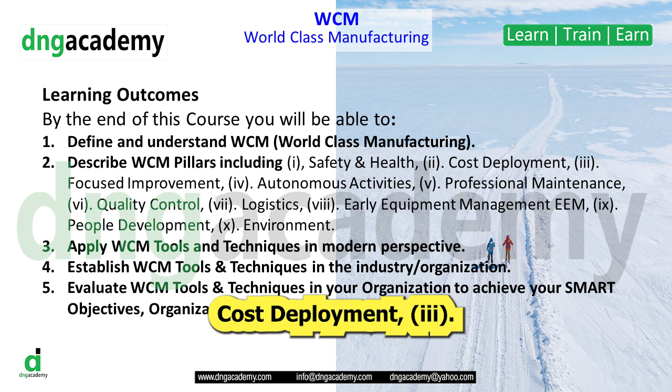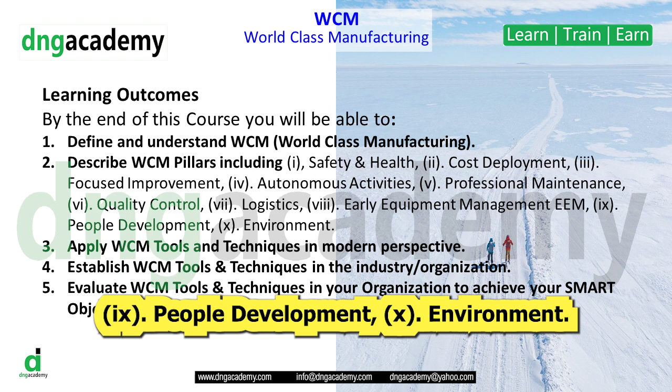By the end of this course, you will be able to: 1. Define and understand WCM. 2. Describe WCM pillars including safety and health, cost deployment, focused improvement, autonomous activities, professional maintenance, quality control, logistics, early equipment management (EEM), people development, and environment.

3. Apply WCM tools and techniques in a modern perspective. 4. Establish WCM tools and techniques in the industry organization. 5. Evaluate WCM tools and techniques in your organization to achieve your SMART objectives, organizational goal, and vision.

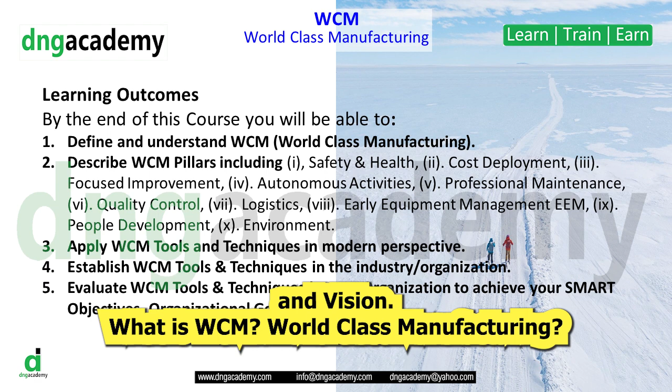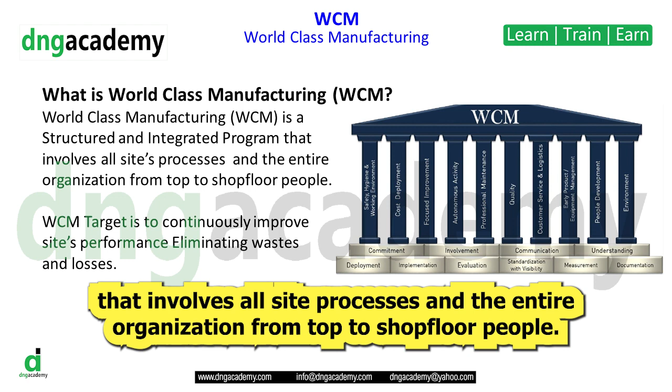What is world-class manufacturing (WCM)? World-class manufacturing is a structured and integrated program that involves all site processes and the entire organization, from top to shop floor people. WCM's target is to continuously improve the site's performance, eliminating waste and losses.

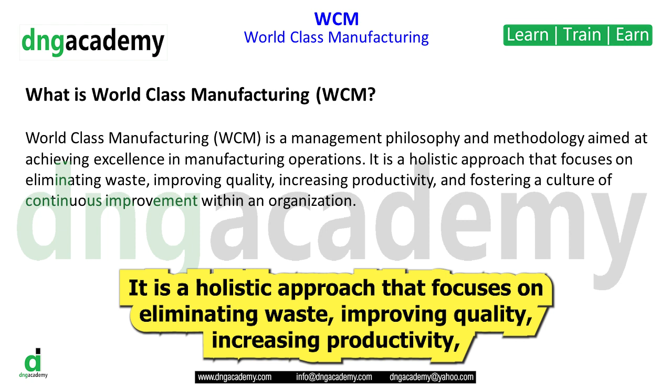World-class manufacturing is a management philosophy and methodology aimed at achieving excellence in manufacturing operations. It is a holistic approach that focuses on eliminating waste, improving quality, increasing productivity, and fostering a culture of continuous improvement within an organization.

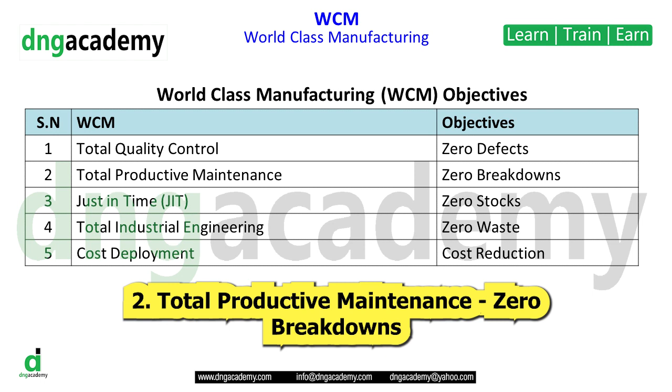1. Total quality control - zero defects. 2. Total productive maintenance - zero breakdowns. 3. Just-in-time - zero stocks. 4. Total industrial engineering - zero waste. 5. Cost deployment - cost reduction.

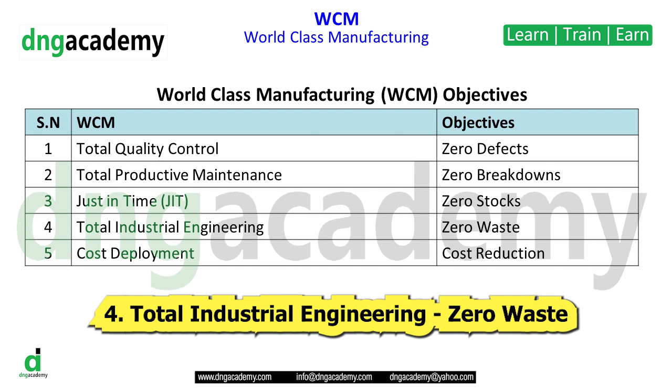WCM is not a project. WCM is not a toolkit of methods and tools. WCM is not a restructuring program. WCM is not a technical job for operators and engineers. WCM is not top-down or bottom-up. WCM is not an activity-oriented program. WCM is not a cost-cutting program.

WCM is a program, a way of working. WCM is an integrated production system. WCM is continuous learning improvement. WCM is a leadership and management program. WCM is top-down and bottom-up. WCM is a result-oriented program. WCM is a safety, quality and productivity program.

Why do we need world-class manufacturing? We need a production system which is simple, rigorous, flexible, powerful, and involves people.

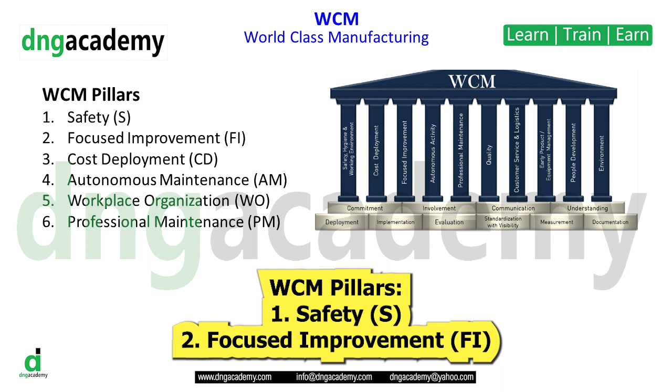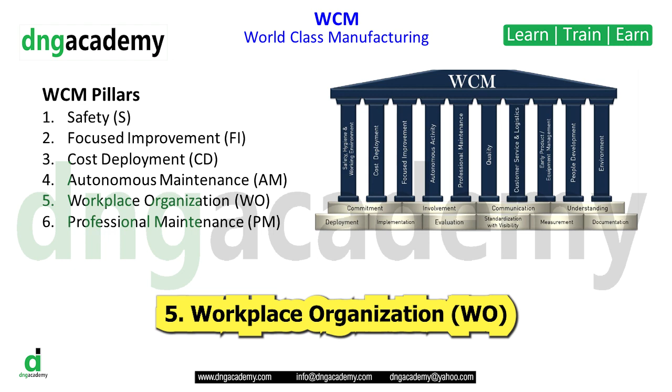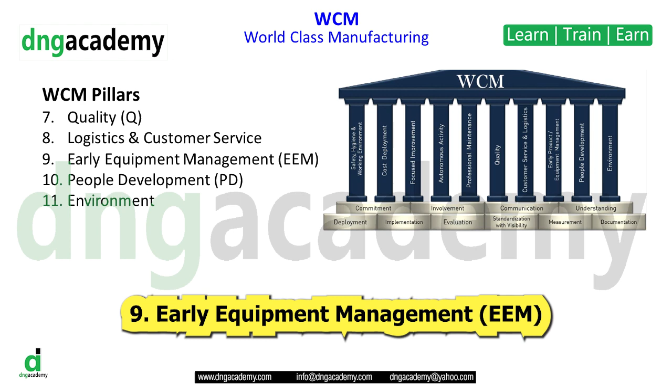WCM pillars: 1. Safety. 2. Focused improvement. 3. Cost deployment. 4. Autonomous maintenance. 5. Workplace organization. 6. Professional maintenance. 7. Quality. 8. Logistics and customer service. 9. Early equipment management. 10. People development. 11. Environment.

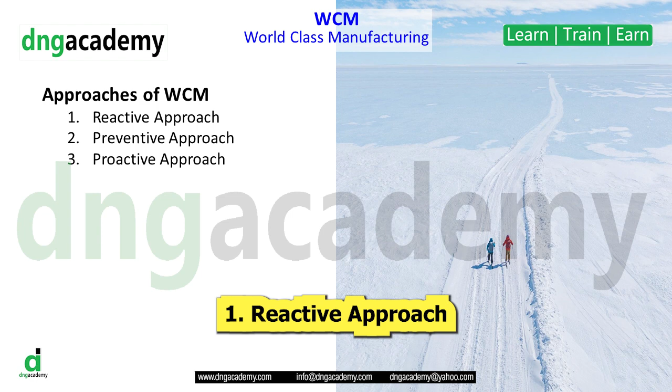Approaches of WCM: 1. Reactive approach. 2. Preventive approach. 3. Proactive approach.

Reactive approach includes: 1. WCM principles. 2. WCM way. 3. 7 WCM tools. 4. Safety management. 5. Environmental management. 6. Quality management. 7. Cost deployment. 8. Customers' needs and wants.

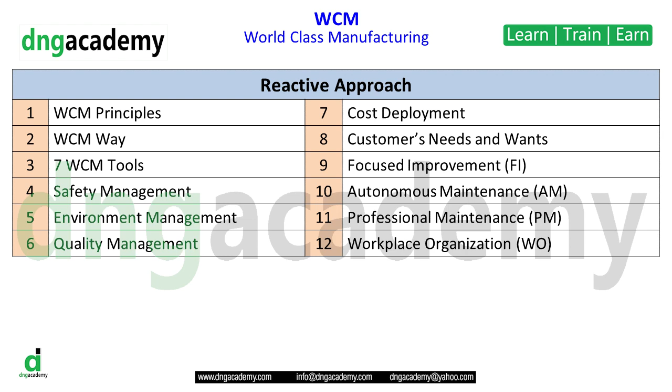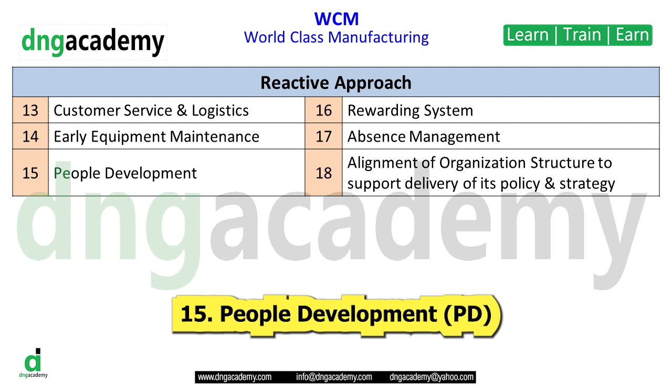9. Focused improvement. 10. Autonomous maintenance. 11. Professional maintenance. 12. Workplace organization. 13. Customer service and logistics. 14. Early equipment maintenance. 15. People development. 16. Rewarding system. 17. Absence management. 18. Strategic alignment.

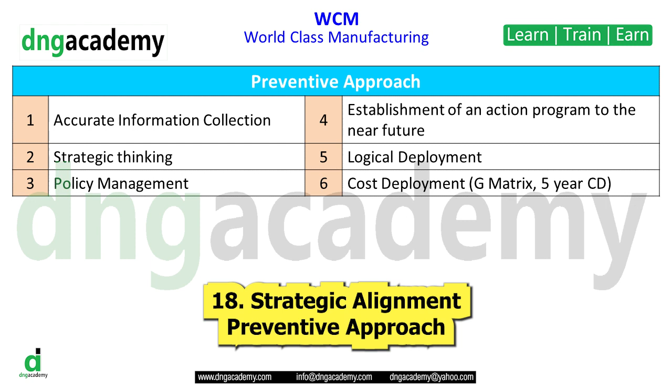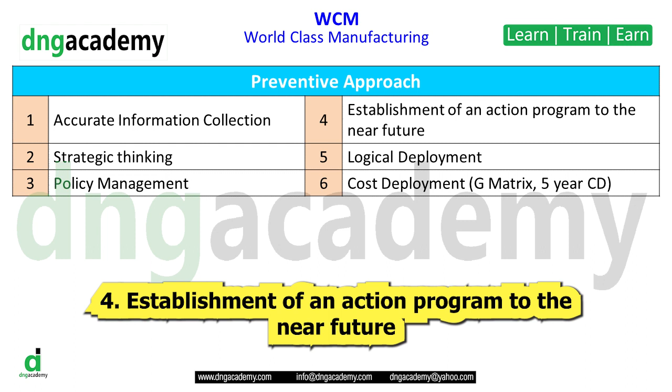Preventive approach: 1. Accurate information collection. 2. Strategic thinking. 3. Policy management. 4. Establishment of an action program for the near future. 5. Logical deployment. 6. Cost deployment.

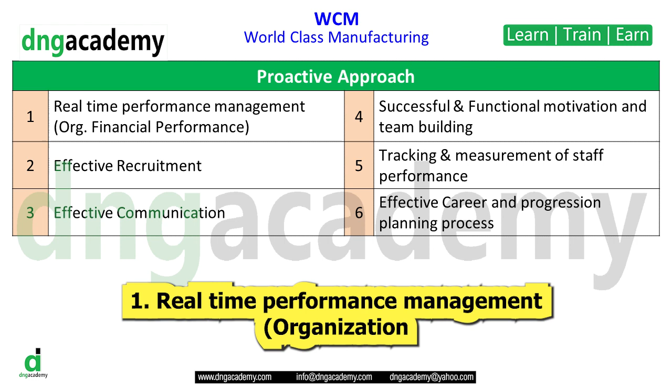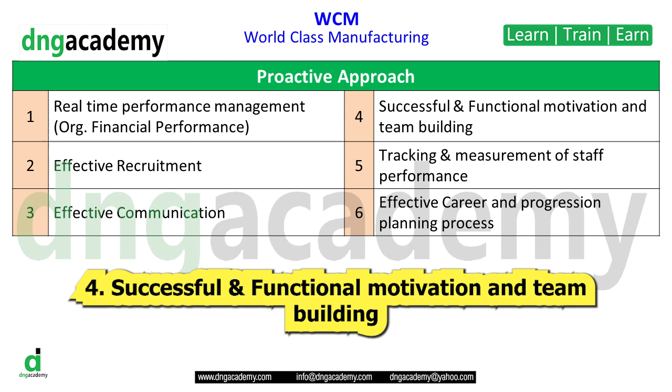Proactive approach: 1. Real-time performance management (ORG) and financial performance. 2. Effective recruitment. 3. Effective communication. 4. Successful and functional motivation and team building. 5. Tracking and measurement of staff performance. 6. Effective career and progression planning process.

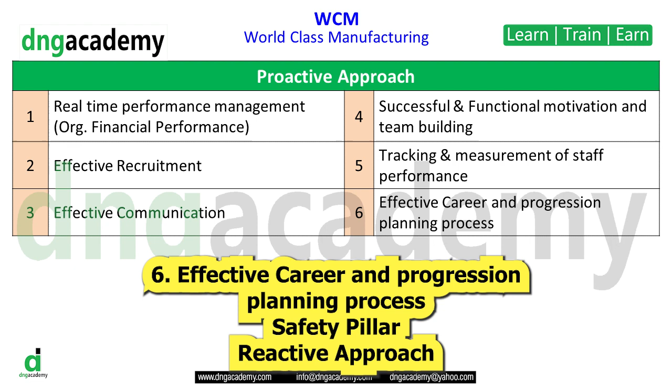Safety pillar, reactive approach: 1. Legal requirement, standards and frameworks. 2. Safety responsibilities and integrated organizations. 3. Emergency safety plan and local legal requirement. 4. Incident classification and principles of Heinrich Pyramid. 5. License to operate (LTO) and LTL. 6. Step 0 and 01.

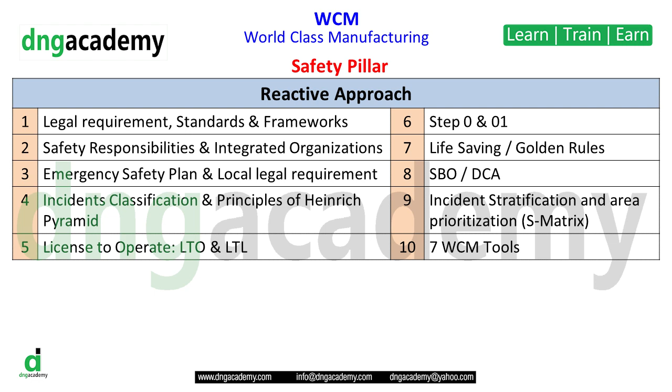7. Life-saving or golden rules. 8. SBO or DCA. 9. Incident stratification and area prioritization. 10. 7 WCM tools.

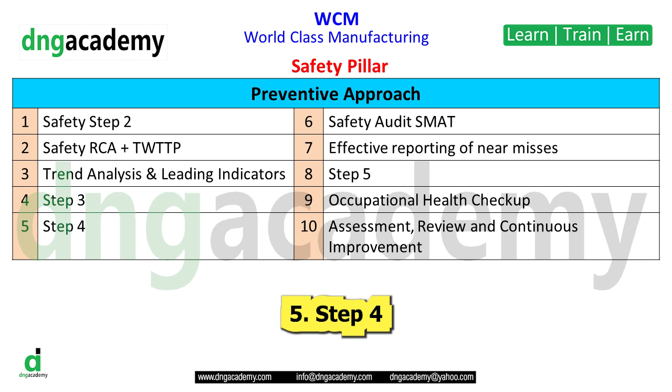Safety pillar, preventive approach: 1. Safety step 2. 2. Safety RCA with TWTTP. 3. Trend analysis and leading indicators. 4. Step 3. 5. Step 4. 6. Safety audit SMAT. 7. Effective reporting of near misses.

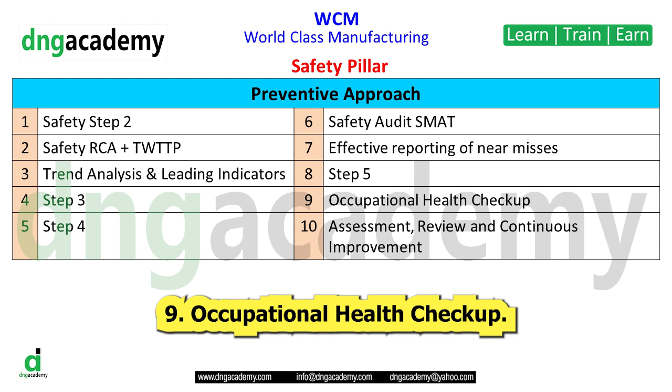8. Step 5. 9. Occupational health checkup. 10. Assessment, review and continuous improvement.

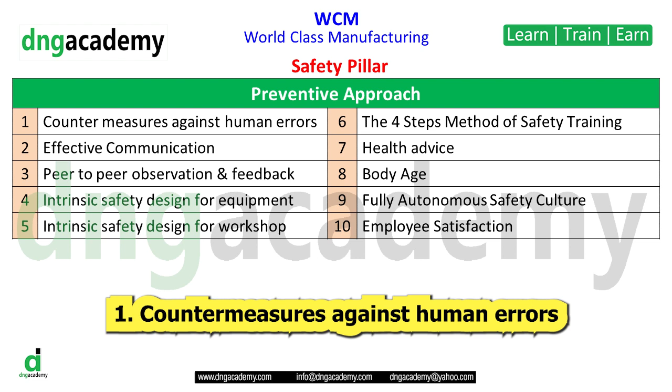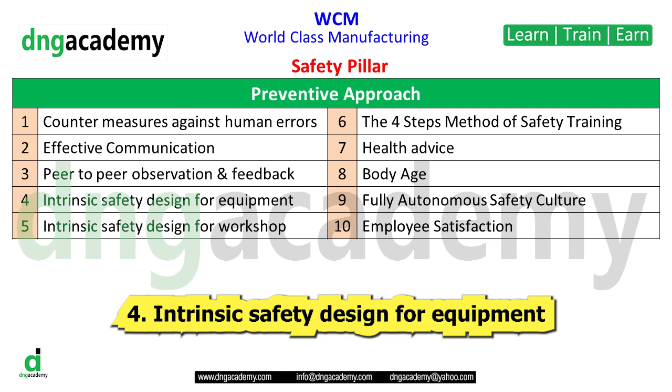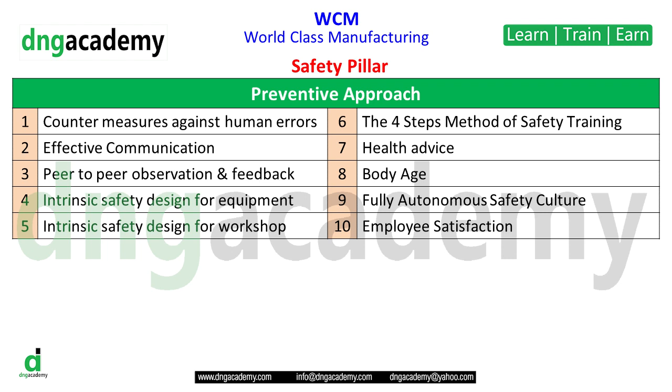Safety pillar, preventive approach continued: 1. Countermeasures against human errors. 2. Effective communication. 3. Peer-to-peer observation and feedback. 4. Intrinsic safety design for equipment. 5. Intrinsic safety design for the workshop. 6. The 4 steps method of safety training. 7. Health advice. 8. Body age. 9. Fully autonomous safety culture. 10. Employee satisfaction.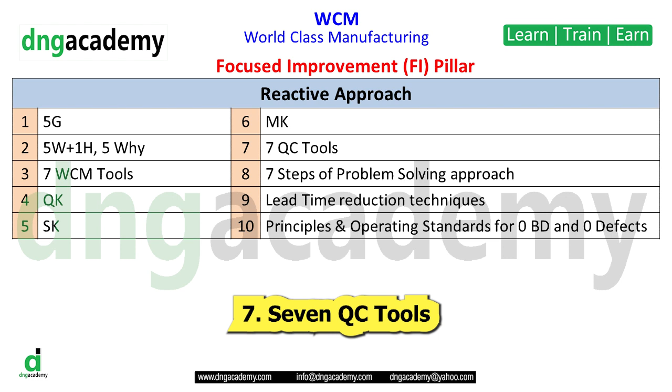8. 7 steps of problem-solving approach. 9. Lead time reduction techniques. 10. Principles and operating standards for zero breakdowns and zero defects.

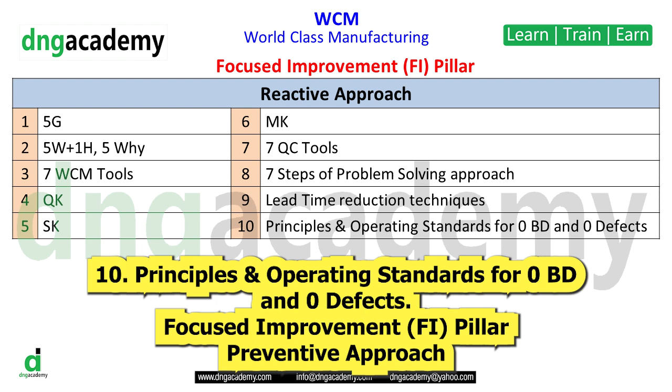Focused improvement pillar, preventive approach: 1. Advanced Kaizen. 2. 7 IE tools. 3. Maintenance theory. 4. CP, CPK, QM matrix, 5QF0D. 5. QC for incoming material.

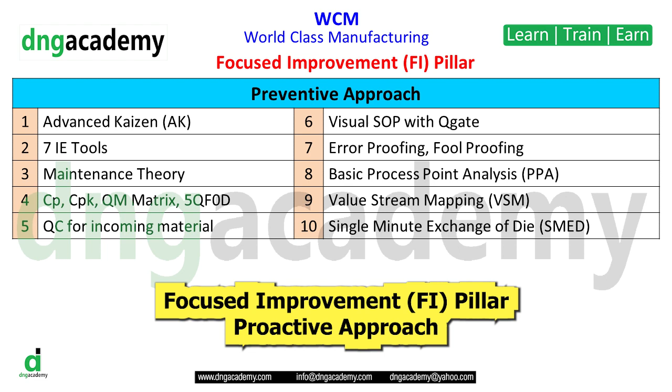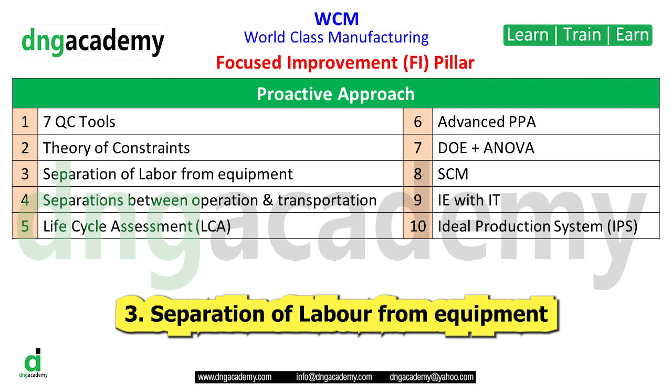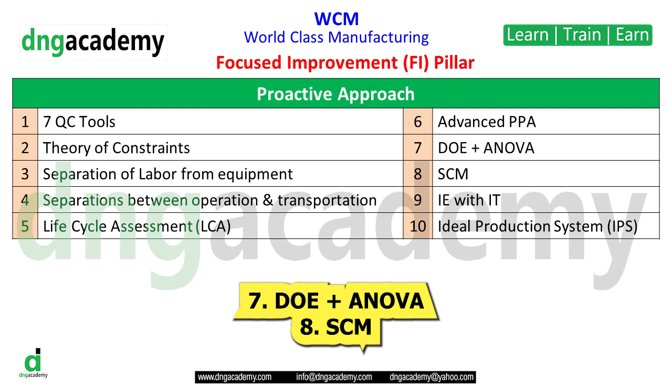Focused improvement pillar, proactive approach: 1. 7 QC tools. 2. Theory of constraints. 3. Separation of labor from equipment. 4. Separation between operations and transportation. 5. Life cycle assessment. 6. Advanced PPA. 7. DOE and ANOVA. 8. SCM. 9. IE with IT. 10. Ideal production system.

Cost deployment pillar, reactive approach: 1. 5G. 2. 5W1H, 5 Why. 3. 7 WCM tools. 4. Definitions of waste and losses. 5. Casual resultant losses. 6. Stratification up to single root cause level.

7. Stratification up to station. 8. A, B and C matrices. 9. D, E and F matrices. 10. Right projects and follow-up.

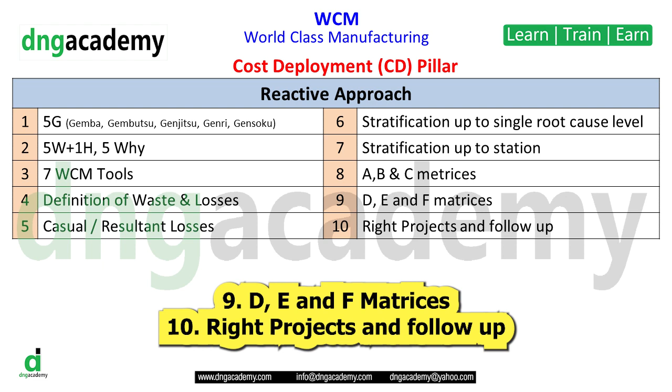Cost deployment pillar, preventive approach: 1. Logical linkage between CD, KPI, and KAI. 2. G matrix. 3. Finance people's guidance. 4. Choosing right projects based on market. 5. Consistent cost deployment for 5 years. 6. Computerized cost deployment.

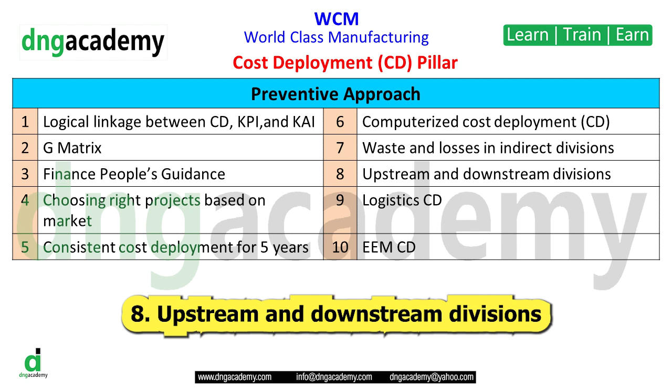7. Waste and losses in indirect divisions. 8. Upstream and downstream divisions. 9. Logistics CD. 10. EEM CD.

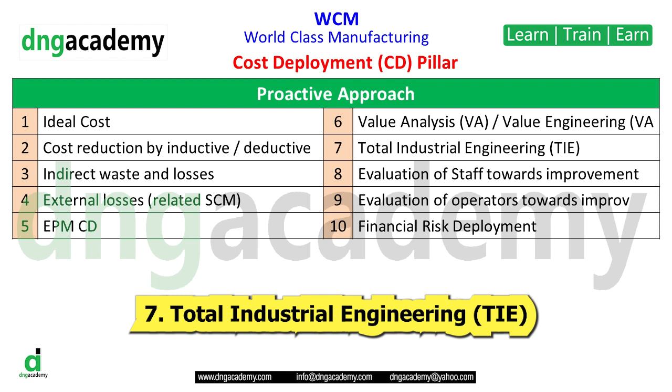7. Total industrial engineering. 8. Evaluation of staff towards improvement. 9. Evaluation of operators towards improvement. 10. Financial risk deployment.

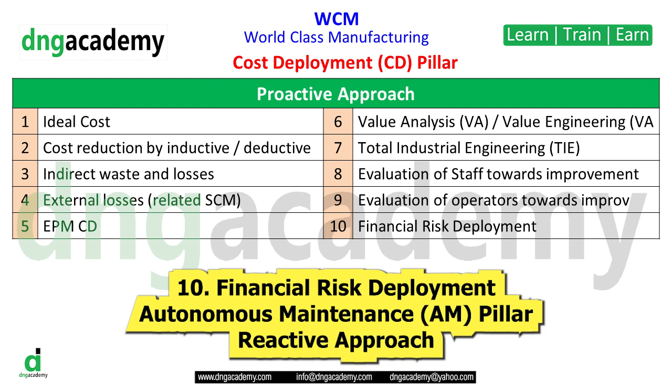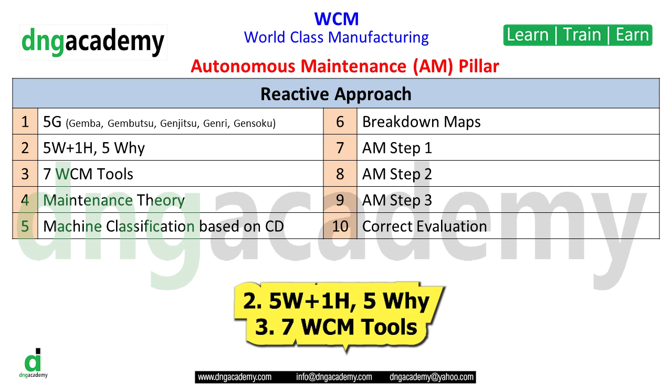Autonomous maintenance pillar, reactive approach: 1. 5G. 2. 5W plus 1H, 5 Why. 3. 7 WCM tools. 4. Maintenance theory. 5. Machine classification based on CD. 6. Breakdown maps. 7. AM Step 1.

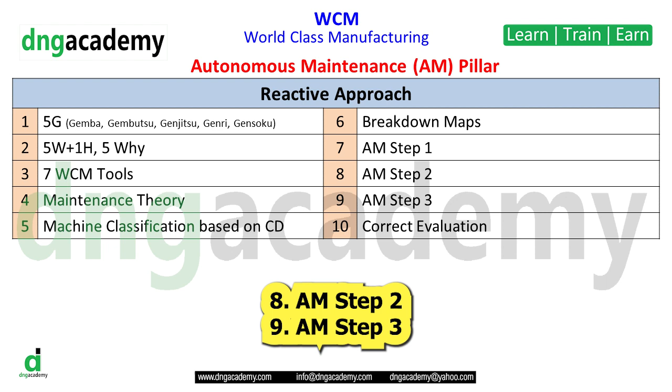8. AM Step 2. 9. AM Step 3. 10. Correct evaluation.

Autonomous maintenance pillar, preventive approach: 1. Machine classification based on P, Q, R, S, M. 2. 4 categories of operators. 3. AM Step 4. 4. Quick Kaizen. 5. AM Step 5.

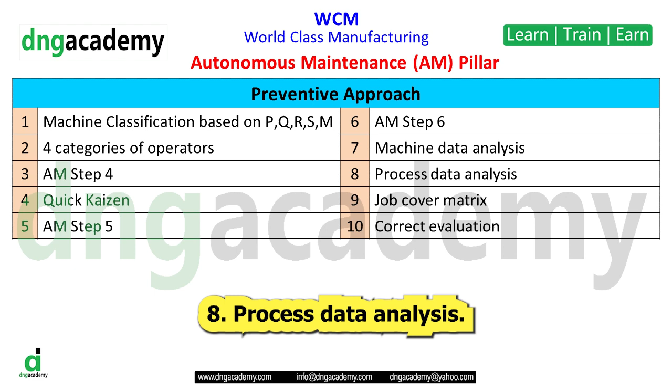6. AM Step 6. 7. Machine data analysis. 8. Process data analysis. 9. Job cover matrix.

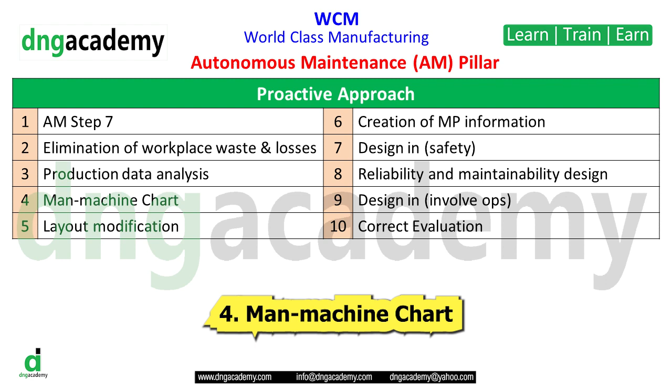10. Correct evaluation. Autonomous maintenance pillar, proactive approach: 1. AM Step 7. 2. Elimination of workplace waste and losses. 3. Production data analysis. 4. Man-machine chart.

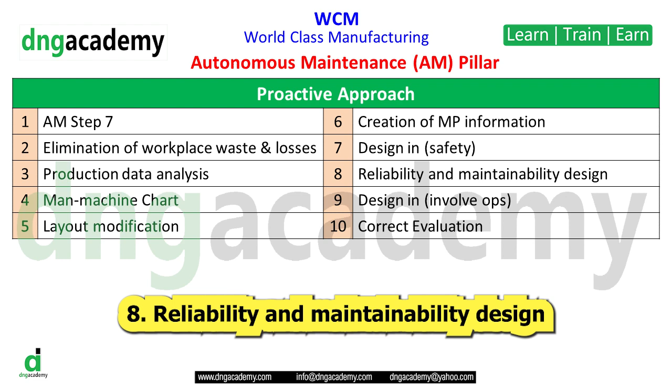5. Layout modification. 6. Creation of MP information. 7. Design in. 8. Reliability and maintainability design. 9. Design in. 10. Correct evaluation.

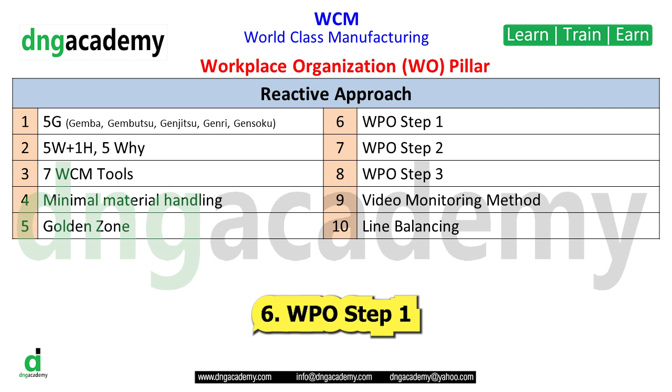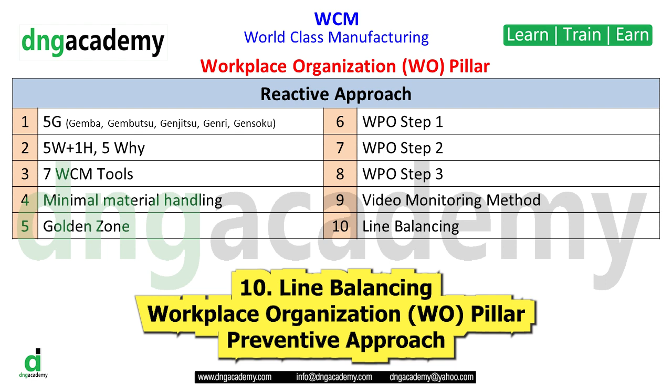7. WPO Step 2. 8. WPO Step 3. 9. Video monitoring method. 10. Line balancing.

Workplace organization pillar, preventive approach: 1. Motion economy. 2. 7 IE tools. 3. One-piece flow. 4. 3 obstacles. 5. No forklift.

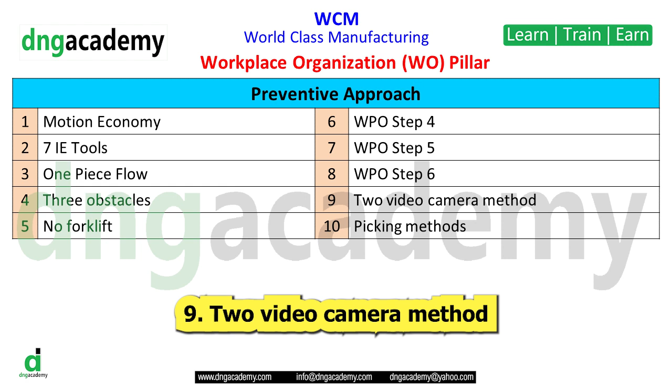6. WPO Step 4. 7. WPO Step 5. 8. WPO Step 6. 9. Two video camera method. 10. Picking methods.

Workplace organization pillar, proactive approach: 1. WPO Step 7. 2. Layout. 3. Visibility. 4. Wiring and piping for flexibility.

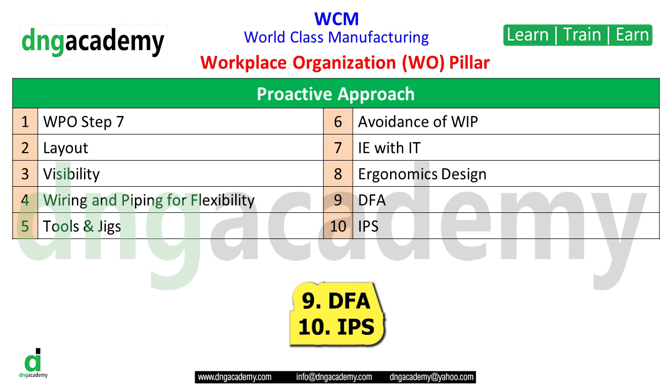5. Tools and jigs. 6. Avoidance of WIP. 7. IE with IT. 8. Ergonomics design. 9. DFA. 10. IPS. For more free online training, please subscribe to DNG Academy and hit the bell icon.